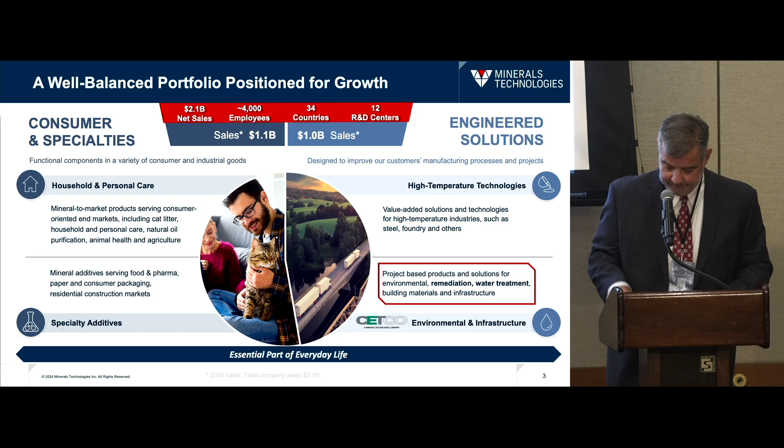First, I want to talk a little bit about market dynamics and what we're seeing in the market. We've had inquiries, participated in pilots, and interacted with governments to have our technology written into legislation as an approved technology for PFAS applications. We have been specified and won projects in the United Kingdom, the US, Canada, Germany, Belgium, France, Sweden, and Japan. This is a global issue.

In terms of the regulatory community, we've heard from many speakers today about changes and delays in regulatory implementation here in the United States, but we're also seeing other countries begin to catch up, particularly in the EU, with progress toward creating the legislative and regulatory drivers that will help create the market.

Public interest litigation continues to be a major driver of our business. When you look at where we've had successes, that's often where there's very strong public interest and court cases that have helped drive funding, particularly in wastewater, drinking water, and some of the in situ projects we've been involved with.

So the total economic impact of what we see within the PFAS world is still evolving. One of the previous speakers mentioned the UCMR5 data, and what's interesting is only 60% of U.S. drinking water sources responded to the EPA's requests in preparing the data for that study. Of those 60%, over 1,500 public water sources within the United States identified that they would not meet the standards. That's a huge opportunity we see just in drinking water alone.

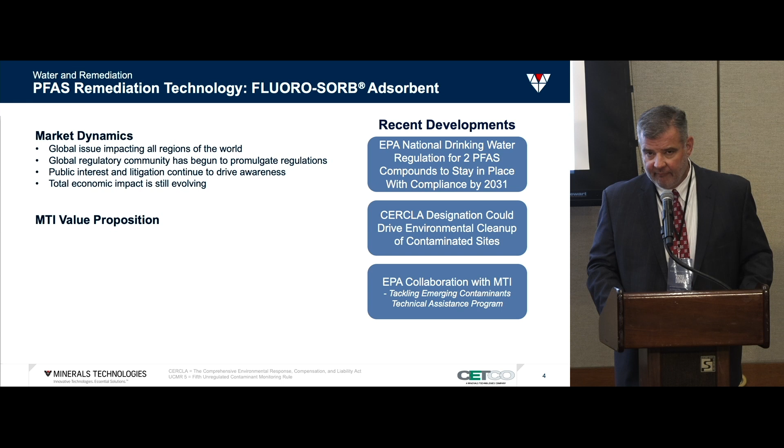Let's move on and talk about the MTI value proposition. We're unique in that we have world-class mineral reserves coupled with industry-leading technical capabilities, along with decades of experience and know-how in applying these technologies to our mineral reserves to create unique and value-added products that can serve a variety of markets. That's perhaps our biggest value proposition.

One of the themes I wanted to talk about today is that while Fluoro-Sorb is a new product, we're not a new company. We've used similar technology with different components to address a number of different applications and problems within various product lines. The technology that works in Fluoro-Sorb has been filtering edible oils for many decades, and it's also been used in our organoclay and remediation product lines for years to address environmental concerns and be part of major environmental cleanups.

For instance, in very close proximity to where we sit today, our technology was used for the Gowanus Canal project. It was used for the Hudson River cleanup over the last several decades. So we are not a new company—this is just a new product that we've developed to address an emerging contaminant.

One of the questions we get a lot has to do with our manufacturing readiness and capacity. Where we stand today is that we have existing online manufacturing capacity to address the demand we see over the next 5 years. With very minimal capital expenditure, we can expand that capacity tenfold. So we're very comfortable with where we sit right now in terms of our ability to meet the expected market demand.

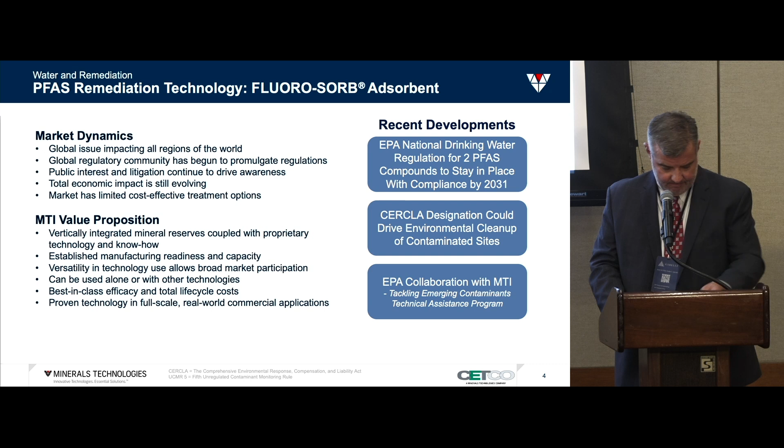Finally, another message I want to leave you with today is that we've moved from the novel new technology phase into the fully implemented, commercially viable option phase of the product. We're going to outline for you here in a few minutes a bunch of real world examples in the different verticals within the PFAS world where we've demonstrated success. So with that, I'd like to turn it over to Barry.

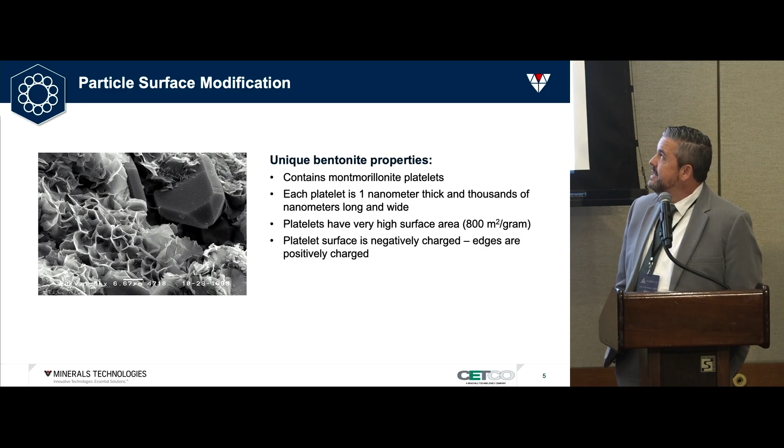This clay contains montmorillonite platelets. These platelets are 1 nanometer thick and thousands of nanometers long and wide. They have an immense amount of surface area. In fact, if you could take molecular tweezers and pull these platelets apart and lay them side to side and end to end, just 1 teaspoon of material would cover an entire football field. The platelet surface is negatively charged and the edges are positively charged.

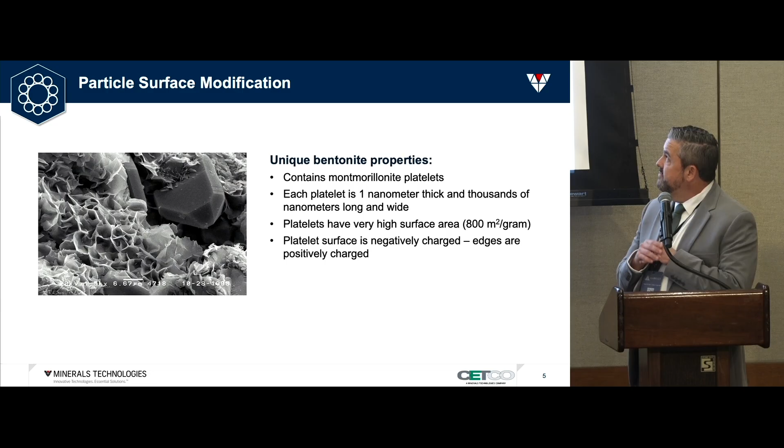Why does that matter? It gives us an amazing foundation to add technology to the product. Our R&D department has developed surface active agents that we can coat these platelets with. If you were to look at these platelets under a microscope, it would look a lot like a deck of playing cards, and the platelets have a natural suspension because of these charges that we call the d-spacing.

So what happens when PFAS comes into the system is it will adhere to the platelet edges and surfaces, and then it'll start working its way in between those structures we call the interspatial galleries, and they'll form hemimicelles, and more PFAS will be allowed to come into the system because these platelets will expand. So it's like an expanding house, or crudely put, like putting more meat into the sandwich.

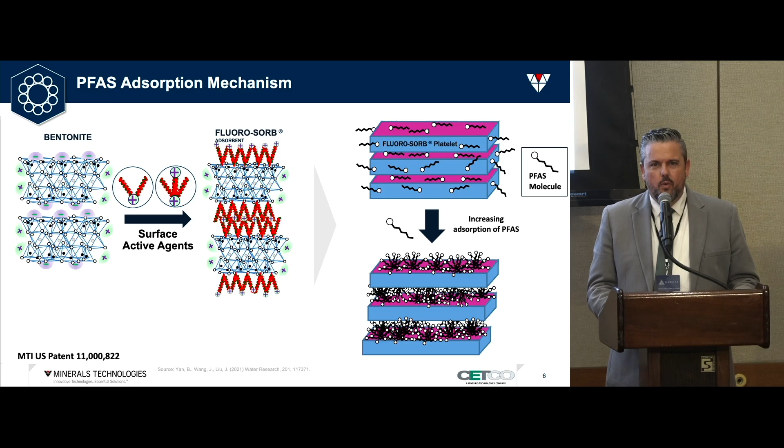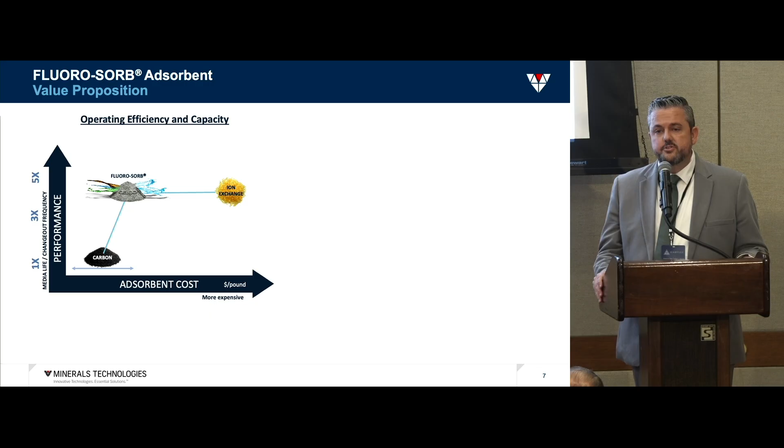Again, why does that matter? Because it gives you a very unique value proposition in both operating efficiency and capacity. When you compare Fluoro-Sorb to commercially available products like granular activated carbon or ion exchange resin, we typically see in a filtration system that Fluoro-Sorb will last 3 to 5 times longer than carbon. So if you're changing out that vessel 5 times for carbon, for Fluoro-Sorb you're typically changing it out 1 time. From a capacity standpoint, we have similar capacity to ion exchange resin, but from a cost per unit or per pound basis, we're significantly less expensive.

When you couple this with kinetics and footprint, the picture really starts to become clear. What does kinetics mean in this context? Kinetics would be how long the media needs to be in contact with that PFAS contaminated water for the PFAS to transfer out of the water and stick to, or adsorb to, the media. For carbon, you need a minimum of 10 minutes for that to take place. We call that the mass transfer zone.

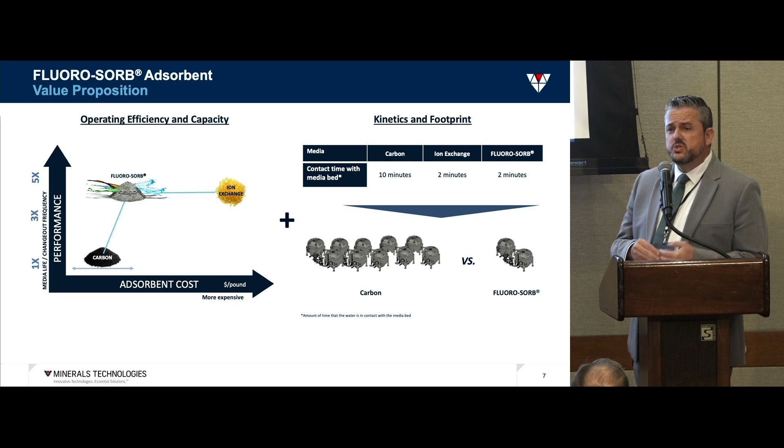For Fluoro-Sorb, you only need 2 minutes. So if you have a fixed volume of water, that could look like 10 carbon vessels versus 2 Fluoro-Sorb vessels because of that kinetic. So it gives you reduced capital. When you combine this higher performance with the lower capital cost and operating cost, you get a lower cost of ownership.

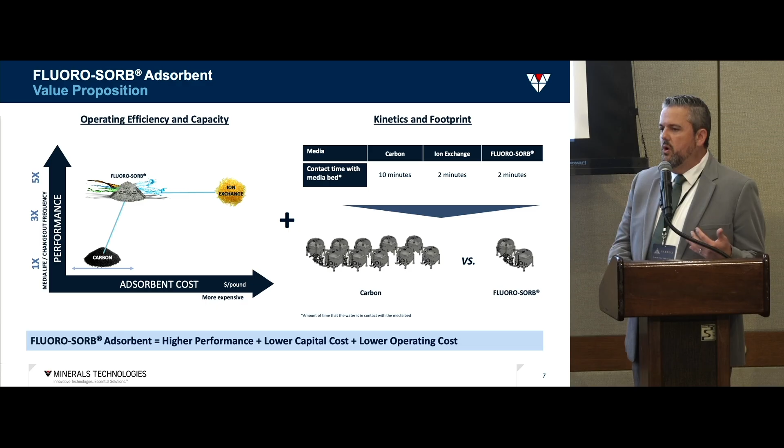Also at MTI, I've mentioned our mining capability and our technology capabilities with our R&D, but we're also a manufacturing company. So we can make Fluoro-Sorb in various sizes, and that gives us a very unique versatility in how it can be deployed in the field. We can make very powdered versions all the way up to granular.

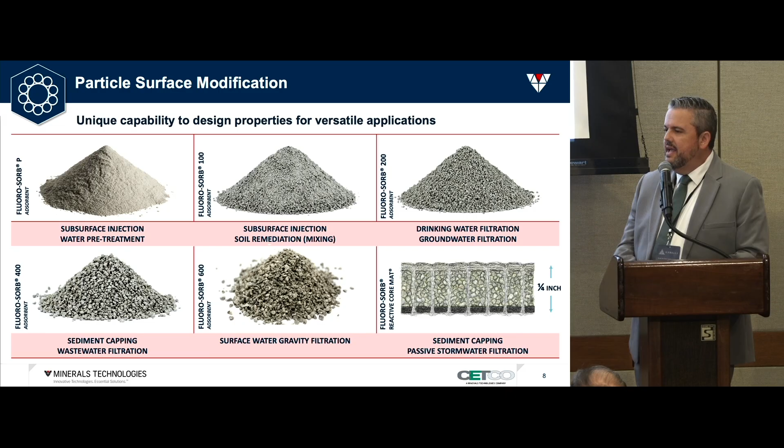The powder is being used in water pretreatment, subsurface injection. As you go up that gradation, it can be mixed with soil. It can be used to treat drinking water, wastewater. This last larger size was developed for surface water plants and their gravity filters. And lastly, we can needle punch it into a reactive core mat, which is a geosynthetic clay liner. We've been in that industry for years in our landfill lining, and now we can put Fluoro-Sorb inside.

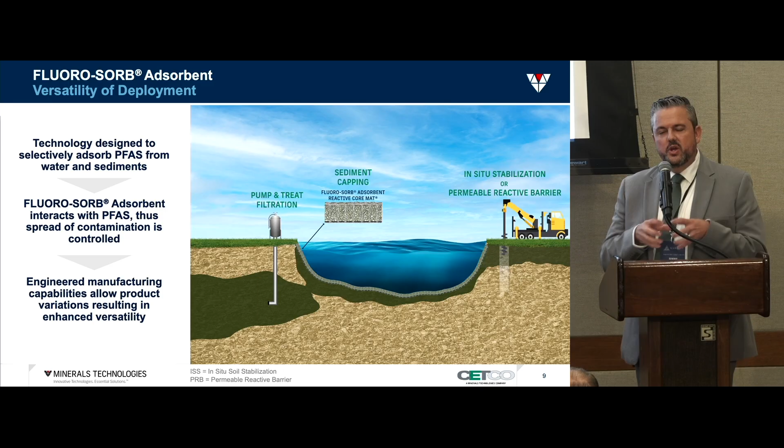This strategy is used often at a contaminated site. Think of an airport, an industrial site, a DoD base, where they have a known contaminant that they don't want to leach off of their site. You can do source control to keep it out of those sensitive water receptors and out of neighboring wells.

As Mike mentioned, the last couple of years we've talked about our university studies and how we've developed the product. Now I want to show you some real-world conditions of how this versatility looks like in real life.

We'll start with drinking water treatment. As Mike mentioned earlier, based on the monitoring data, there's many utilities that if the regulation was enforced today, they'd not be ready. So we've worked with a lot of engineering firms and utilities globally to give those utilities another option in their piloting, so they can improve their economics and efficiencies at the plant.

In fact, since we've been here last year, we've had 8 full-scale new drinking water installations using Fluoro-Sorb. Some examples are on the right side of the screen, ranging anywhere from 250,000 gallons per day up to a plant that treats 130 million gallons per day.

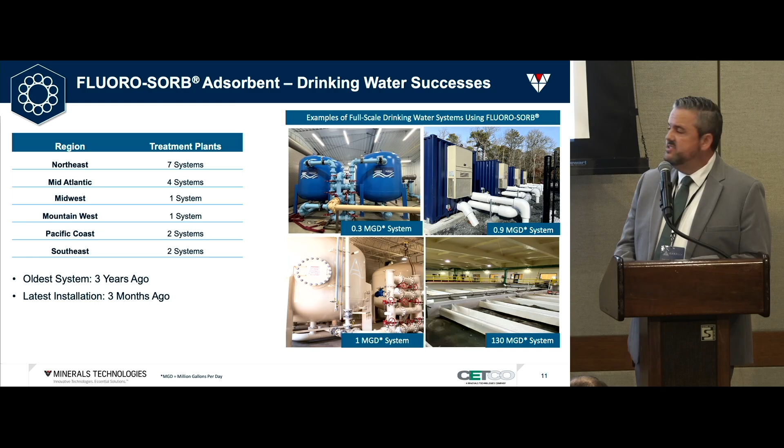On the left-hand side of the screen, these represent 17 projects throughout various regions of North America where Fluoro-Sorb has either been specified, already installed, or is waiting on the design build of the capital equipment. Our oldest system is 3 years old, so fairly recent. Our latest installation has been in the last 3 months, and we've put in systems for both groundwater and surface water treatment.

Going to surface water, I want to touch on this because it is a unique opportunity. When you compare it to groundwater, the co-contaminants are a little different, right? And it's hard—sometimes things like carbon can get overwhelmed by those organics and break through quickly, raising the economics there.

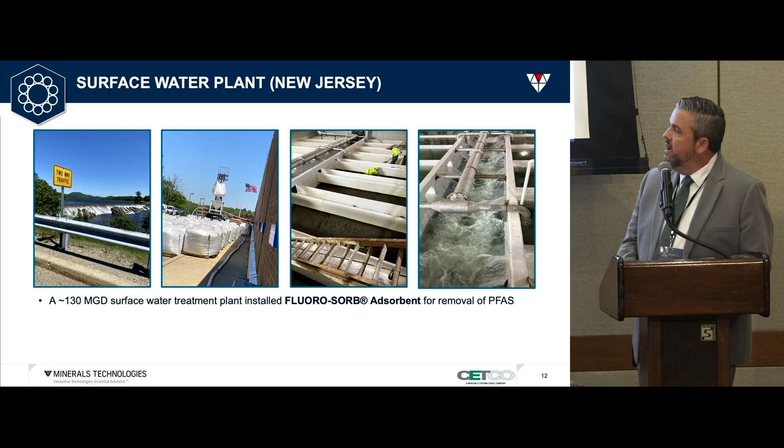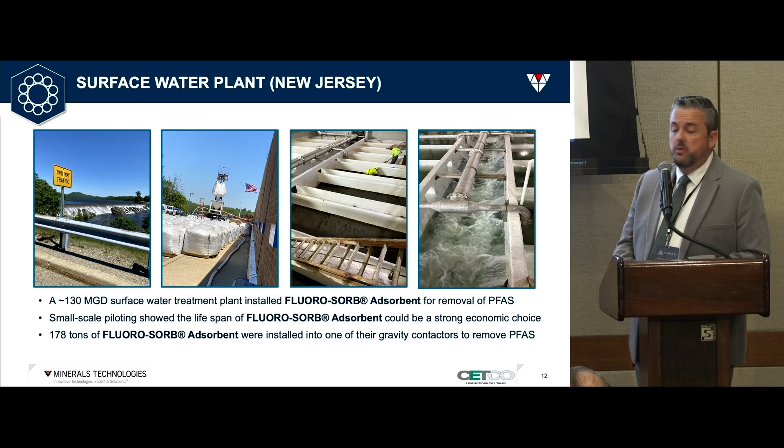So this is a plant in New Jersey. They treat 130 million gallons per day, and they installed Fluoro-Sorb in just one of their full-scale primary gravity filters, so it didn't require any capital. Small-scale piloting showed that Fluoro-Sorb could be a strong economic choice. So they put in 178 tons of Fluoro-Sorb into just one of those gravity contactors to remove the PFAS. This one's been running just since May of 2025.

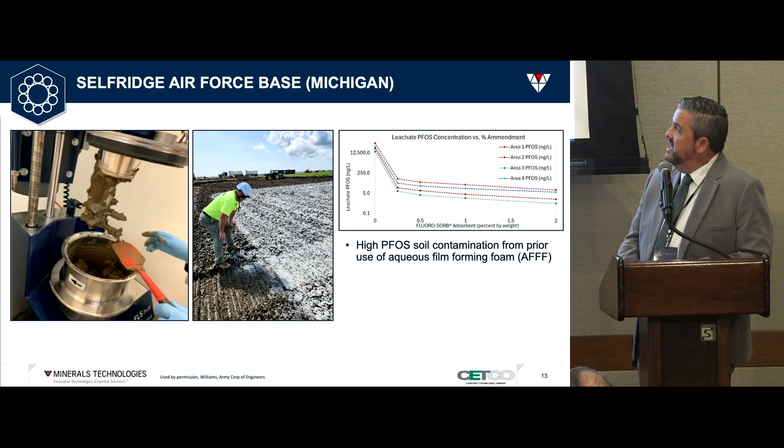To keep with the theme on versatility and deployment, I wanted to touch on Selfridge Air Force Base in Michigan. This is a soil stabilization case. They had high PFOS contamination from the prior use of AFFF. They used Fluoro-Sorb to deploy across 8 acres and mix with the soil to prevent leaching into the groundwater. With just a dosage of 0.5% to 1% that was confirmed in the lab, they confirmed they could meet their remedial goals. And it did just that.

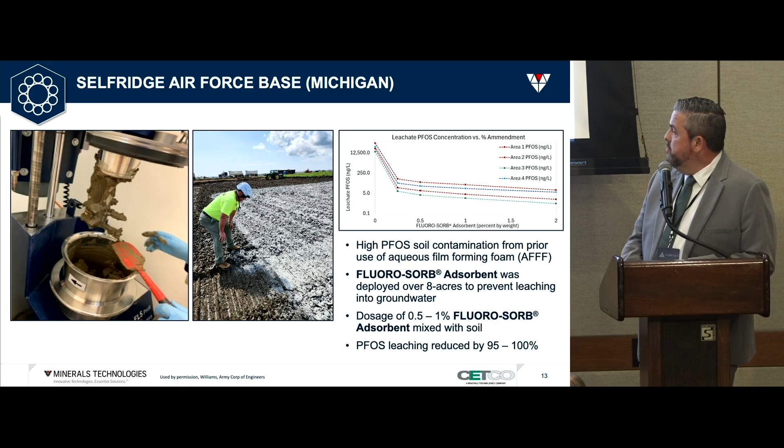They did their post-monitoring of PFOS, and it was reduced by 95 to 100%.

Moving on to another versatile deployment, this is Wright-Patterson Air Force Base in Ohio. The base selected Fluoro-Sorb on 2 of the sites they deemed most contaminated. One is this groundwater capture trench you'll see in the slide. All the groundwater flows into this trench, then flows downhill to this filtration basin filled with Fluoro-Sorb.

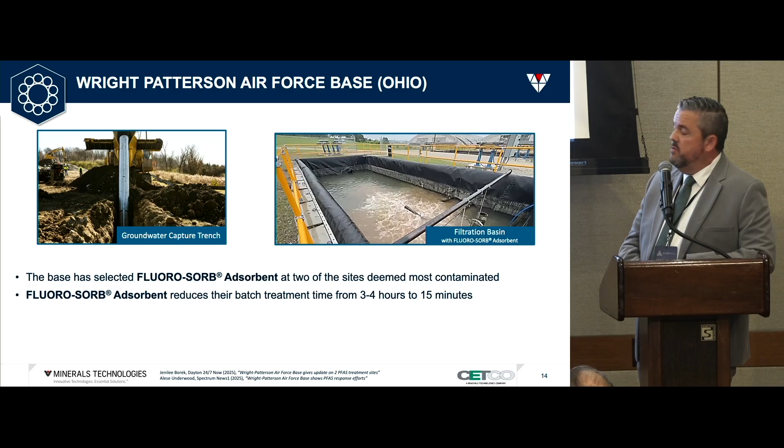Fluoro-Sorb reduces their batch time from 3 to 4 hours down to 15 minutes. That talks about the fast kinetics we mentioned earlier. So far, this treatment system has treated over 30 million gallons and is still non-detect, discharging clean water.

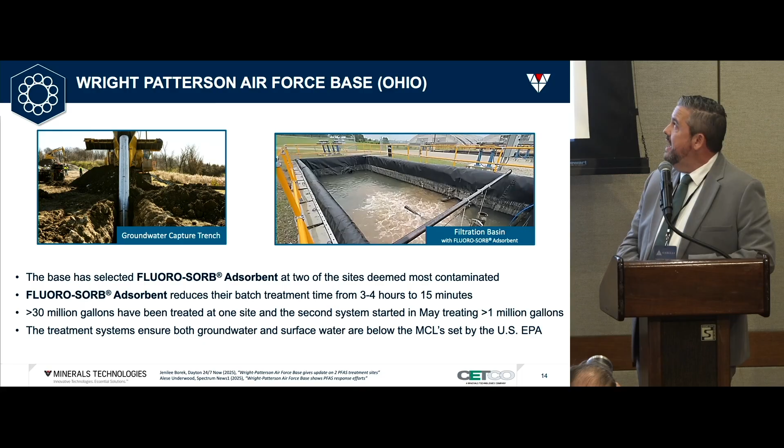Since then, they've put in a second system just in May that's already treated over 1 million gallons on the site. These treatment systems ensure that both their groundwater and surface water are meeting the MCLs set by the EPA. I'll note that once this media becomes spent, it would be replaced and become a recurring revenue for us.

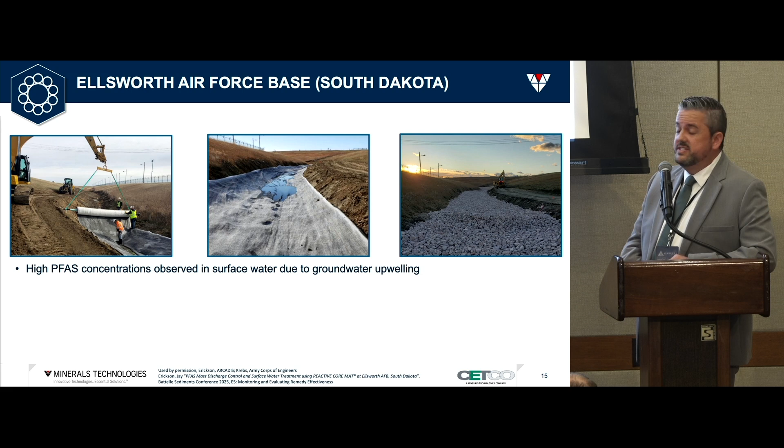Another versatile deployment is our reactive core mat, that needle-punch geotextile I told you about. This is at Ellsworth Air Force Base in South Dakota. They had high PFAS concentrations in their surface water due to contaminated groundwater upwelling.

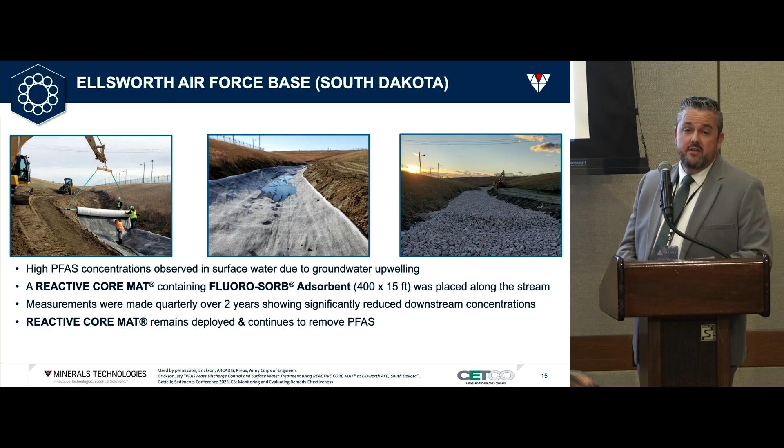They put a reactive core mat along a stream 400 feet long by 15 feet wide, and took measurements every quarter over the course of 2 years, seeing significantly reduced concentrations meeting their remedial goals. That reactive core mat stays in place today and is still removing PFAS. This one is at the Canadian Department of National Defense.

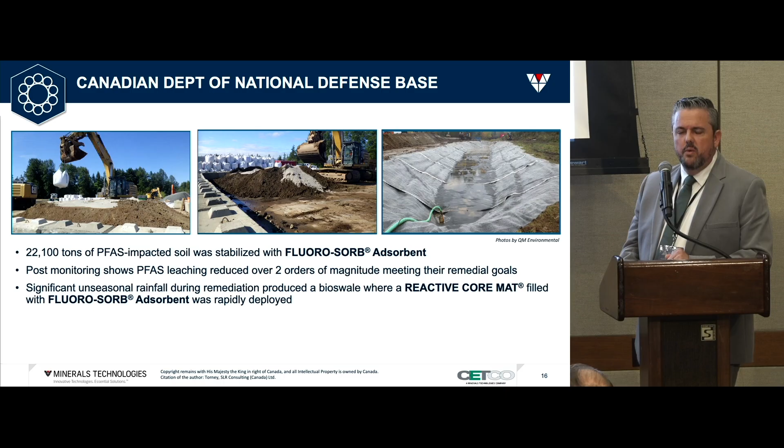We had a unique situation on this site because when they dug out the contamination, they had unseasonal rainfall. Before they had amended it, they were concerned that water washing off the pile would spread PFAS contamination. They asked if there was something they could deploy quickly. We sent them a reactive core mat to line this bioswale, and it mitigated the issue. This also shows that the reactive core mat can be used for emergency response situations.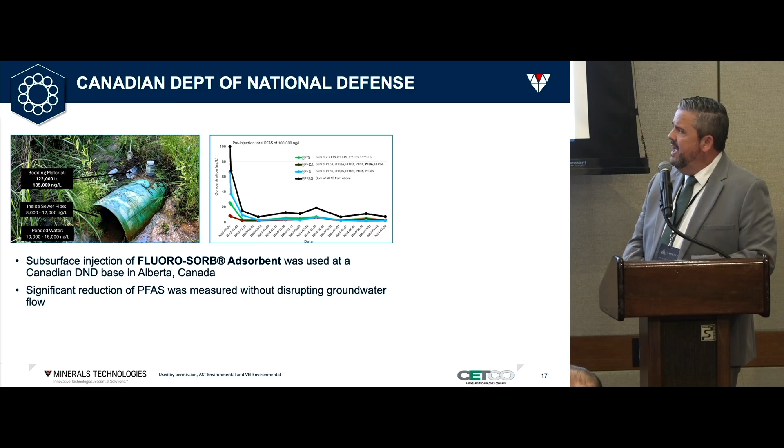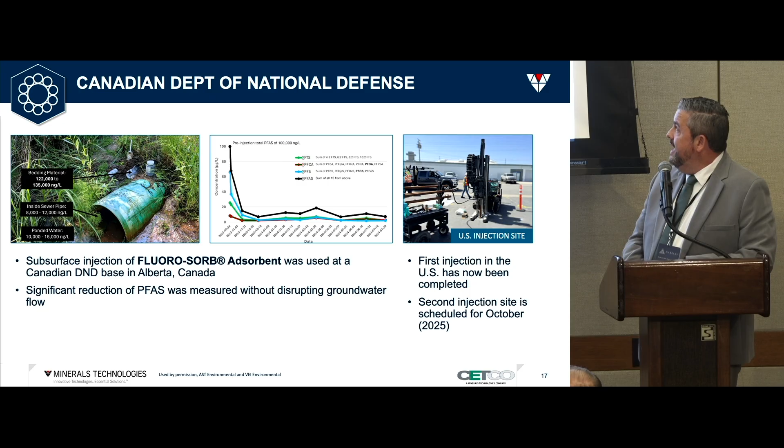One more with the Canadian Department of National Defense, and still another unique deployment. This was a subsurface injection. Imagine making a slurry of Fluorosorb, putting a rod in the ground, and injecting it. They did that in Alberta, Canada, and saw significant reductions of PFAS, measured without disturbing any of their groundwater flow. Since then, we have had our first injection in the United States just earlier this year. There's a photo of that on the slide, and the second injection is scheduled for October.

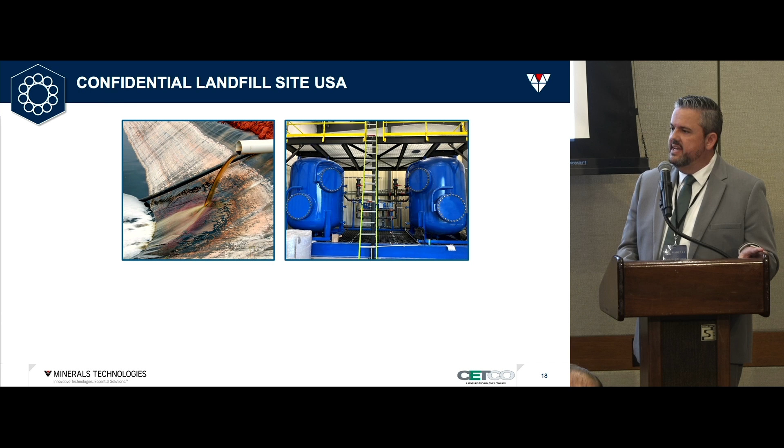Finally, I'm going to touch on this last case study. It's not really versatile in how it was deployed, but the type of water is certainly different. It's contaminated landfill leachate at a site that had over 50,000 parts per trillion. If any of you know much about leachate, we call it a witch's brew - pretty nasty contamination. But they were over 50,000 and needed to be below 20 for 6 PFAS.

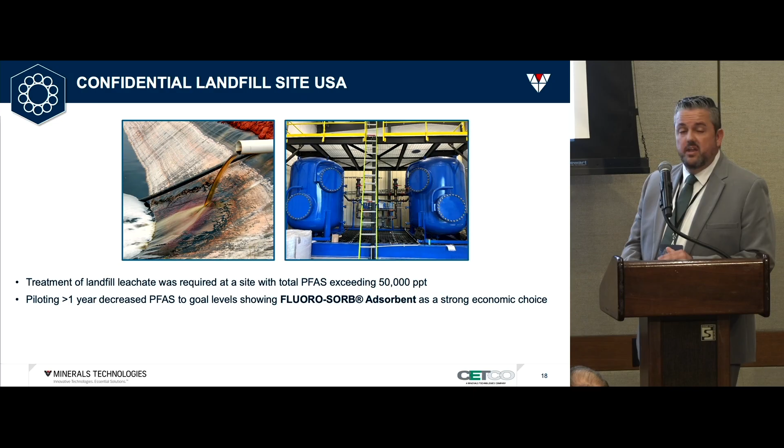They piloted Fluorosorb for over a year and showed that they could meet their goals, and it was a strong economic choice. They put in a vessel purification system filled with Fluorosorb to treat over 300,000 gallons per day. This full-scale system has been running for over 2 years, and the media change-out is about every 4 months.

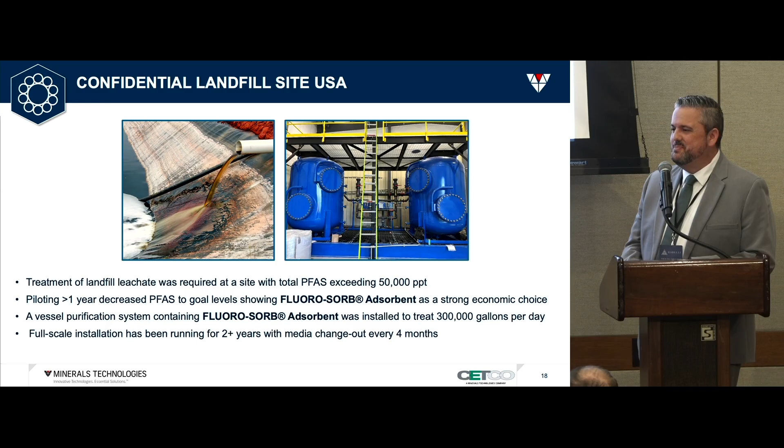So I hope that I've explained how this versatility of deployment is important, and I'm going to hand it back to Mike just to close us out.

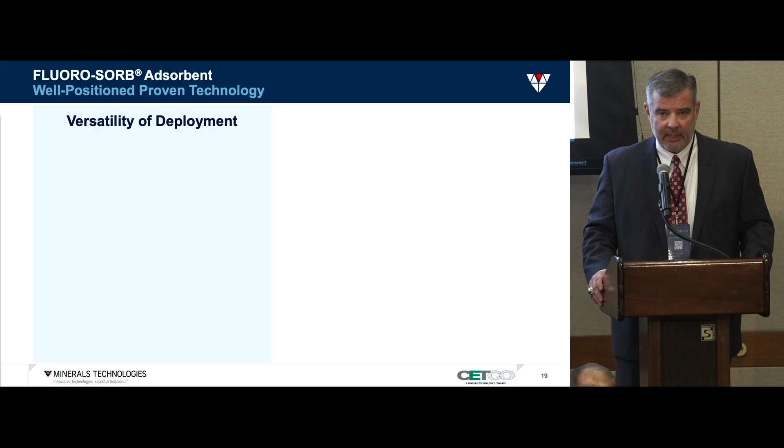All righty, very quickly, because I want to try to leave some time for questions. A couple of takeaways. Versatility of deployment - our product has proven results in standalone systems, working in conjunction with other technologies, and in dual media systems. The global footprint - the product's backed by a global company with decades of experience doing business in a global economy, and that gives us a significant advantage.

Demonstrated cost effectiveness and the fact that we outperform other solutions. We have verifiable, best-in-class kinetics, efficacy, and the lowest total cost of ownership of any of the competing solutions.

Full-scale deployments - as I mentioned earlier, we feel strongly that we've moved from the novel technology phase into the viable commercial option phase, and we look forward to talking to anyone that would like to have further discussions about some opportunities that they may represent.

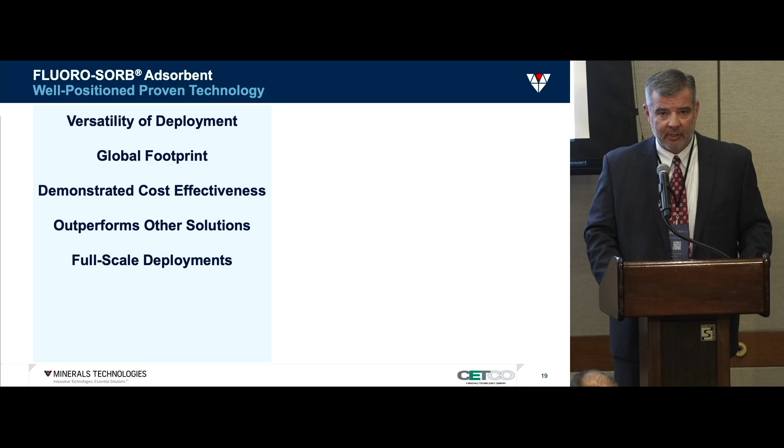IP protection - our product is patented. We have a composition of matter patent as well as method of use patents on the product, and we take the protection of our IP very, very seriously.

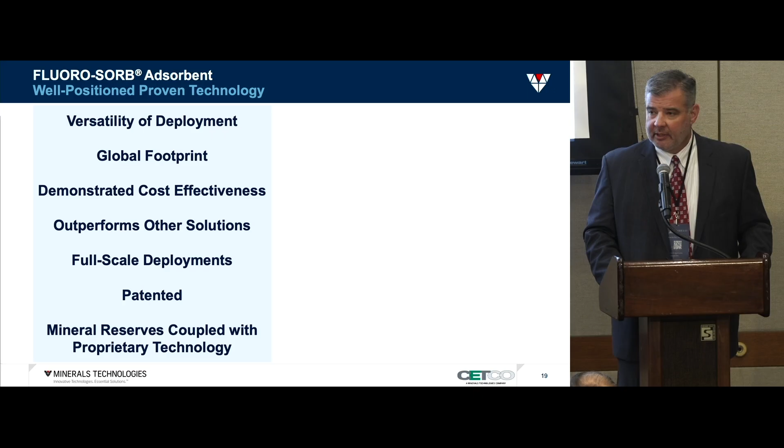And then finally, our mineral reserves coupled with proprietary technology - that's the basis for our entire minerals technology business. We feel that the experience and expertise we have there have helped us develop a unique product with the versatility to influence and have a role in all of the 4 verticals within the PFAS world.

So finally, we've talked today about some real-world applications of the product, but we remain very busy with a pipeline of over 250 pilots and studies in all 4 of the verticals you see on this slide. So with that, any questions?

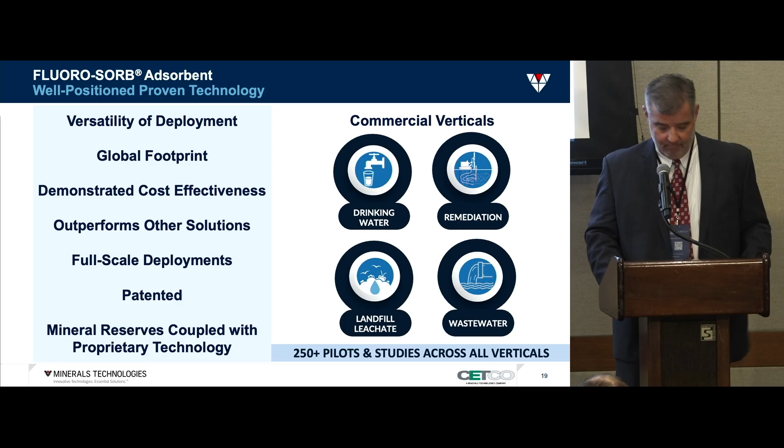So I will start with a similar question that I asked about activated carbon. While Fluorosorb absorbs more contaminants and can be used for a longer period of time, at some point it is going to be saturated with PFAS. So can you talk about how you remediate that contaminated membrane, let's call it? And what are the potential possibilities in terms of making sure it does not leach again from that?

That's a great question, and I think one of the words you used at the very end, leaching, is the key to it. Our product is different, and I know Barry talked about some of the electrochemical differentiators with the product, but I'm going to put it in a little bit simpler terms.

If you think back to high school chemistry, our product starts with sodium bentonite clay, so you have this free sodium ion floating out there. When we talk about surface particle modification in our manufacturing process, what we're doing is taking this mineral, sodium bentonite clay, removing that free sodium ion, and replacing it with a chemical surface additive that attracts the PFAS. What happens, and the way that works, is there's an electrochemical bond between the PFAS compounds and our product.

It's not dissimilar to when you hear about stabilized lead in soils that is no longer hazardous, or trivalent chromium that can be stabilized and rendered insoluble. We have significant data and have spent a great deal of time studying the leachability of our product, and the electrochemical bond is very, very strong.